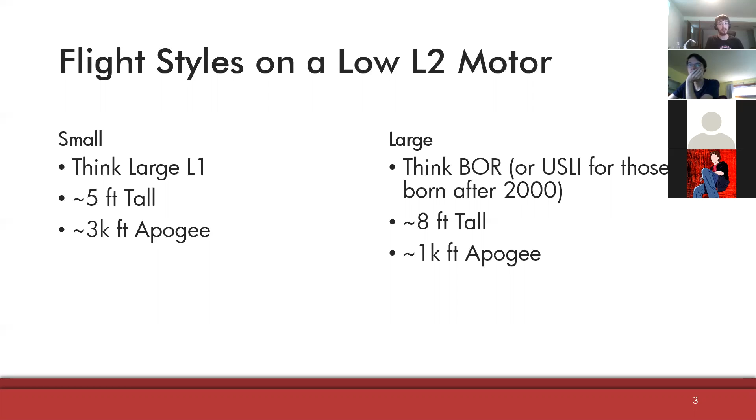Depending on what launch sites you're able to go to - if you have a place with a really low waiver, you might consider building a larger L2 so you fly under that. I personally think the trend in the past has been more people built these large L2s, although with my year in particular, me and Thierry, and I think Chris too, have all started building smaller L2s. Part of the advantage is I personally think they look cooler, although that's very subjective. But smaller is cheaper in general, and it can be easier to manage.

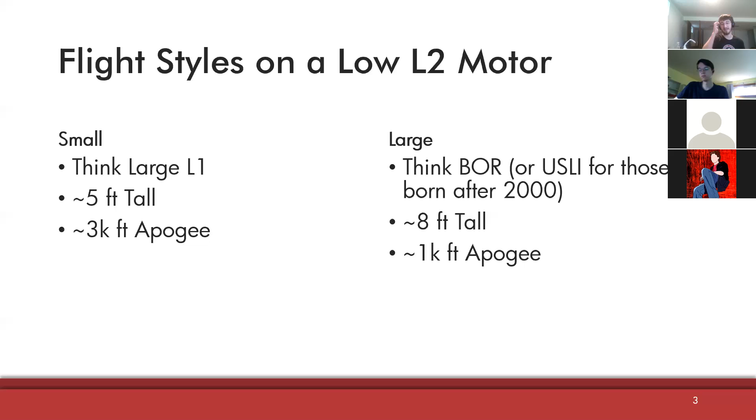One of the very important things is that you consider how forces are transferred through parts and ultimately into the airframe. Any force exerted on a small part of your rocket eventually has to be transferred to the rocket as a whole. You have to keep in mind that you can have the strongest part, like an aluminum bulkhead, but that doesn't mean much if it's affixed to something that's not strong enough.

Like putting an aluminum bulkhead and affixing that inside a phenolic airframe - that's a good way to break something.

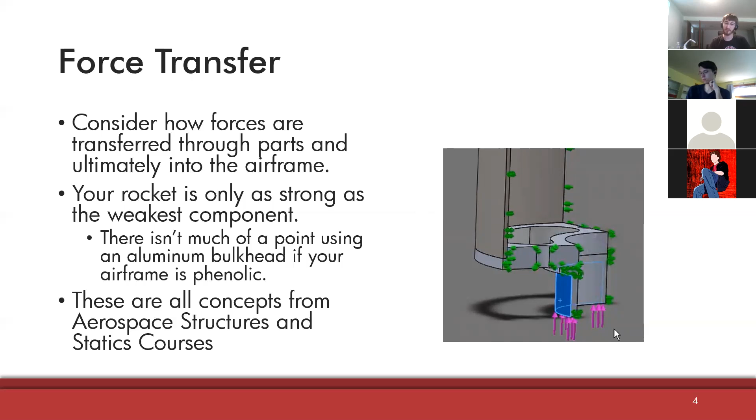These are all concepts that are talked about in aerospace structures and statics courses, and I also recommend going back and reviewing some notes from that to get a more intuitive understanding of how these forces are transferred through components.

Next up, the major forces you guys will need to consider. You can split these up between instantaneous and sustained forces. Instantaneous forces will tend to be considerably higher.

The largest force your rocket will experience is probably recovery forces - that being the instantaneous force applied by the parachute onto your shock cord, then into your bulkhead, and then from there into your airframe.

I think, out of the rocket failures I've seen that were mechanical, most of them have been due to some failure in handling the recovery forces.

For example, the very first USLI rocket was built with a bulkhead that wasn't strong enough, and it ripped out.

It's really important to make sure that not only is your shock cord securely attached to a U or I bolt that is very firmly attached to a bulkhead, but that bulkhead also needs to be secured inside the airframe such that it's not going to break out.

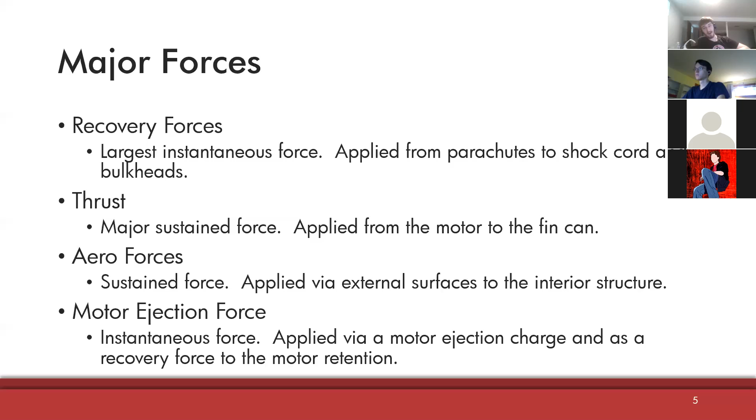Now that we've covered that, we can talk a bit more about materials. I'm going to go through some of the different major components and what type of materials are frequently used.

Airframe materials to start off with. I talked about this a bit with the L1 guide, but to go a bit more in depth, I've listed what I believe are the most common materials right here. There's certainly some others if you want to do some research, but going from weakest to strongest, we have phenolic.

Phenolic is essentially cardboard with epoxy to make a composite. It can tend to be a bit brittle, and might be a little difficult to design with, but if you keep your recovery forces low, use a large enough parachute, and get a low enough ground descent velocity, you can probably be fine. We'll talk about epoxy later.

Next up, cardboard, which seems like it should be lower on the list, but the reason I placed cardboard here is because you can buy really thick cardboard, which has different diameters than some other rocket components, so you have to be careful with the outer diameter. It is quite cheap and has decent performance, and unlike phenolic, it's not brittle, which makes your failure modes a little less catastrophic.

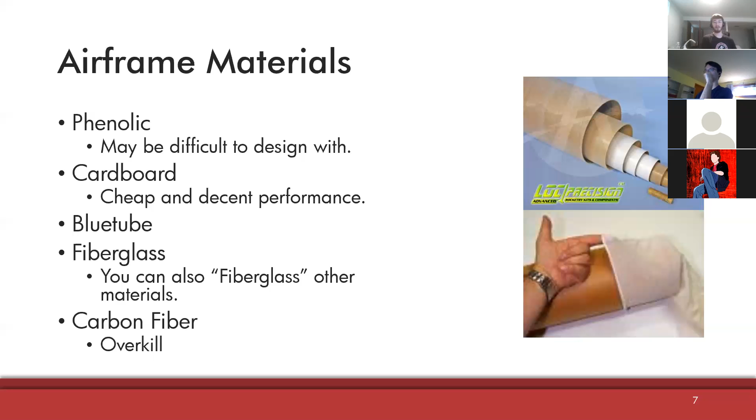Moving on, bulkheads and fin materials. I think in L1 territory, you can get away with quarter-inch plywood in almost any situation. In the L2 area, quarter-inch can work fine, but you need to be conscious of the size of your rocket and the recovery forces, because this is where you start reaching the upper limits of quarter-inch. If you're designing one of the smaller L2 rockets, you can probably get away with it. But if you're going for a larger one, I would consider switching to half-inch.

One other thing: if you don't want to buy a separate sheet of half-inch plywood, you can always epoxy two quarter-inch pieces together and make a sandwich. That's something we've done before. Next up, and these I do want to mention...

You probably should stick with wood when you're doing your first L2 rocket, but for larger L2 rockets, going higher, faster, whatever, you may want to consider switching to aluminum bulkheads, which, granted, requires some machining and can get quite expensive and heavy. But the upside is it's very strong, and you'll be very hard pressed to actually break it.

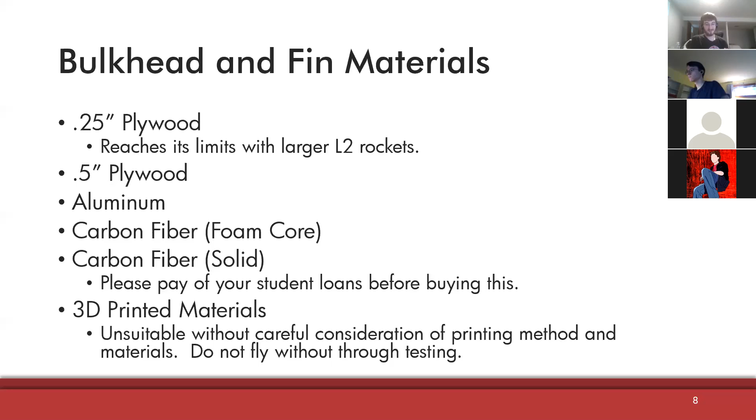Lastly, some fixturing methods, the main two being epoxy and bolts. Bolts can be a lot of fun and look very fancy. They're very quick to assemble. You're able to disassemble it, which could be advantageous if you want to replace parts, or if something breaks, you could just take the rocket apart and replace something.

The downsides being, though, in this case, you now need to design your parts with threads, which can be difficult. In some situations, you may require getting a tap for metal parts or using threaded inserts for 3D printed parts. They also concentrate stress, because for example, if I have a bulkhead with 4 bolt points, instead of the stress being evenly distributed around the entire circumference of the bulkhead, it's now concentrated at the points where the bolts are holding it on.

That's something you need to keep in mind when you're comparing the bulkhead to the actual airframe it's in. You need to make sure the airframe isn't going to get broken by all the stress concentrated where the bolts are.

As for epoxy, it does require some measure of skill in assembly. If you want it to look really good, you have to take a moment and actually do it right. I very highly recommend going online and looking up some tutorials about this—look at what a good example of an epoxy job is. Unlike bolts, once you epoxy something, that's it. You're done. You have to break it if you want to disassemble it.

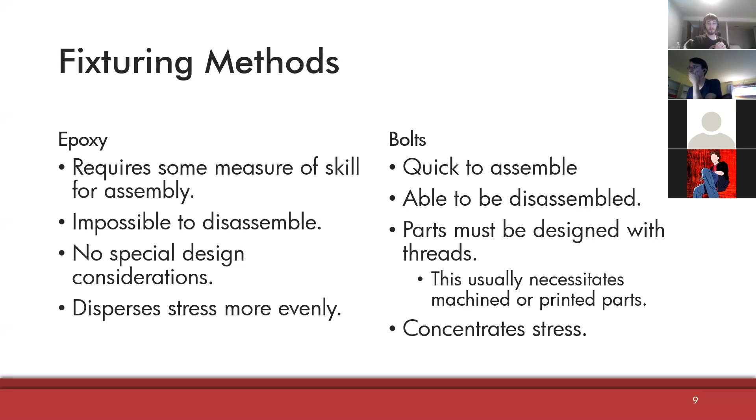But the advantages: there are very few special design considerations. You don't need any fancy tools to do it. And you can be a lot more free with what types of materials you're using. For example, if you're using a wooden bulkhead, it might be kind of difficult to bolt that into the airframe, whereas that's pretty easy to epoxy in. And lastly, if you do it well, you will disperse stress much more evenly, which can significantly reduce the loads that particular areas of a part need to handle.

To talk a little bit more on epoxy—just real quickly, wear PPE, nitrile gloves. Just don't get epoxy on your hands. It's not fun.

There's no such thing as just epoxy. There's a lot of different types of epoxies that are best for different materials, best for different environmental conditions, and also with viscosities ranging from everything like a light syrup all the way to putty and even clay.

It's definitely important to consider what you're epoxying. If you're doing something like laying up carbon fiber or fiberglass and you want to make a composite with it, you may want something a little less viscous. But in the case where you're epoxying in bulkheads or fins, you may want something more viscous, and might even consider using something like putty or clay. That will make it significantly easier to work with when your epoxy isn't just running off of what you're trying to do.

One of the things you can also use are some fillers for epoxy, such as Kevlar pulp, which will help reduce the runniness of it and can create some neat composites.

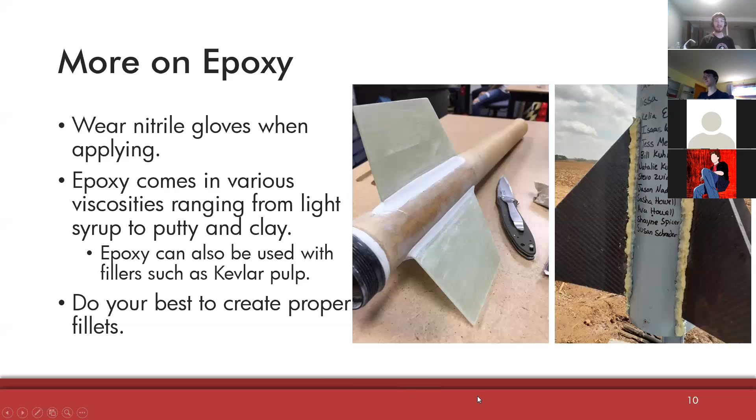Continuing on, now we're going to talk a bit more about actual structures within your rocket. I'm going to go through some of the common structures that you will need to have. This could vary depending on how you build your rocket, the setup and whatnot, but these will cover most situations. Afterwards, we're going to go into Solidworks and look at some examples.

Bulkheads, I've referenced these a lot so far, but the important thing to think of when adding a bulkhead is that its primary job is to take recovery forces and disperse them through itself and into the airframe without breaking.

These are probably one of the most critical components when you're thinking about how forces are distributed. You really need to make sure that anywhere stress is concentrated on your bulkhead, your bulkhead can withstand it. Because if you break a bulkhead, all of a sudden you have a free-falling object, and that's no good.

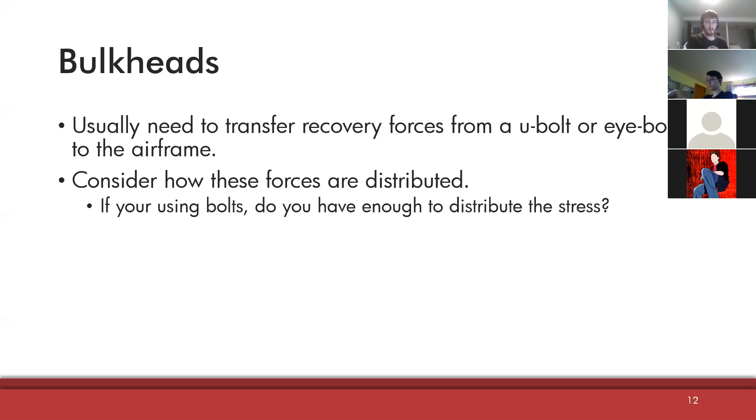It's really important to look at how your bulkhead is fixed to things. As earlier, I referenced epoxy and bolts. If you use bolts to affix your bulkhead, you need to make sure that both the airframe and the bulkhead itself can handle that, as well as the forces of the actual harness on it. Because of the nature of U-bolts and eye-bolts, those will tend to concentrate force in the center where you mount them. It's a very important part to get right.

Fin cans do a lot of things, basically just the bottom of your rocket. It needs to hold the fins and the motor in the correct orientation without any movement. You should strive to reduce vibrations and play, because if stuff is moving around, you introduce various moments and your rocket will have an unstable flight.

Safety-wise, it is critical that your fin shoulder extend to the motor tube, basically the shoulder being the tab on the fin that goes on the inside of the rocket. That is one of the things that could show up on your NAR Level 2 exam—it's all about fin shoulders.

Also, you need to make sure that you're using centering rings well, and those will do a good job of dispersing the force from the motor onto the actual airframe. You'll usually want several of them, not only for that, but also to ensure, as the name implies, that your motor remains centrally located and that it's not canted.

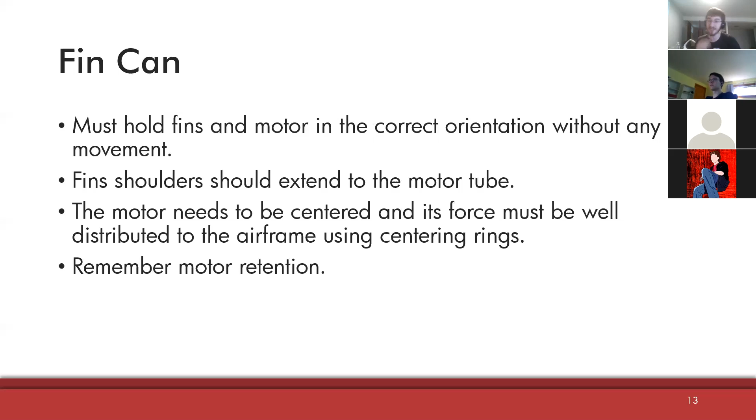Lastly, I want to talk a bit about the electronics bay, since this is probably the easiest one to mess up. Usually, in most situations, both sides of your electronics bay must take recovery forces, or at least one side. If you only have one side, then you're probably fine, but both sides is probably an easier design rocket-wise.

In any case, it's important to consider how your electronics will be mounted. This is vital to ensure that all your electronics are static in place and not bouncing around the inside. Typically for most altimeters, they'll just have holes in them that make it easy to put a screw in and mount them directly to a sled or some sort of 3D printed mount. If you're able to design one of those, that could be a very convenient thing to do.

But you also have to keep in mind components like batteries and whatnot that don't just have a convenient mounting hole. You need to make something to keep them in place.

You also need to make sure that your rocket is actually sealed off from the electronics bay. One failure mode to avoid is having ejection gases leak from a black powder charge just above the E-bay. You want to avoid those leaking into the E-bay, because that will increase the pressure and could cause your rocket to think it's at some other altitude, possibly even causing another charge to deploy, which will mess up your day and your rocket will drift very far.

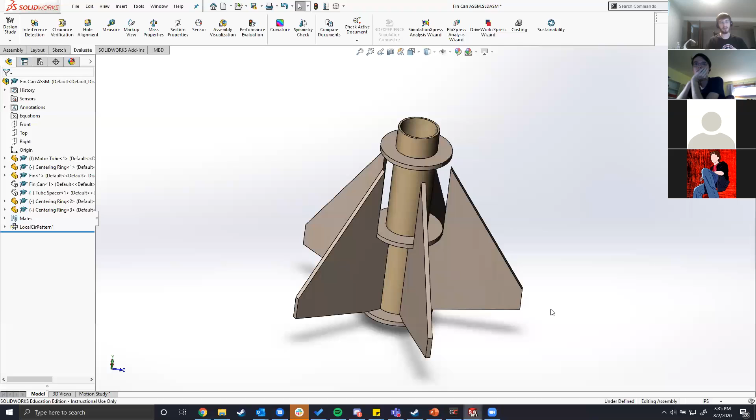Moving on to some examples, we're going to go into Solidworks now and take a look at this. There's a few parts in, but this is a very basic fin can. You can see there's the fins, tube for the motor, and centering rings. This is really the basics, and you'd have your actual airframe tube that slides down around the outside.

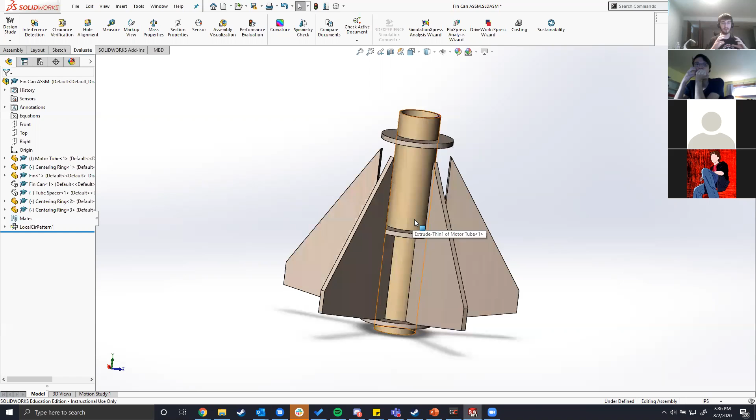Unfortunately, I don't have one CADed, so I can't put that in. But essentially, you'd assemble this section, put it in, and so on. This could very easily be assembled using epoxy by filleting all these different interfaces, putting a fillet right there, etc., to make sure that it's all well and good.

I will note this does have 5 fins. The easiest way to assemble a rocket is using 4 fins. That makes it really easy to make a jig to keep the fins properly angled and not canted when you're assembling it.

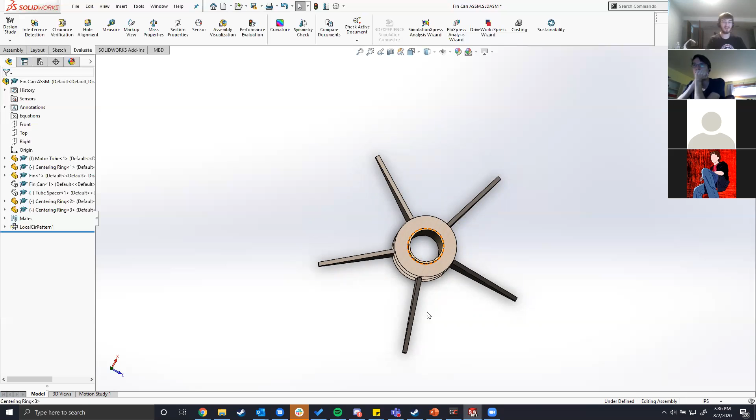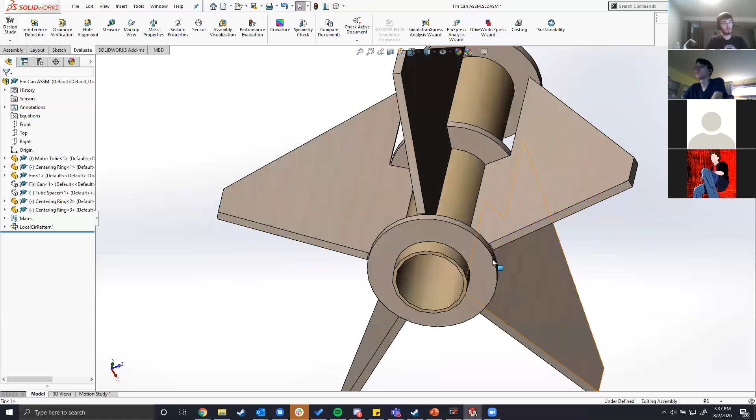If you're assembling with epoxy, you will need to be sure to hold everything in place while the epoxy cures. You can see one thing missing from this is actual motor retention, so in an actual design, you may want to drill some holes and add some clips here. This is probably one of the simplest ways you can design it.

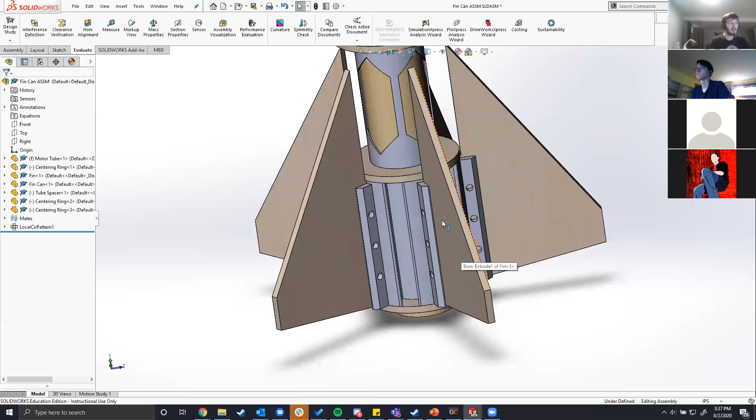Now, if we unhide some components, you'll see this is actually more complicated than you initially thought. This right here is the fin can for my rocket, for my L2. You can see here, instead of just having the fins epoxied straight in, now they are located within this 3D printed mount.

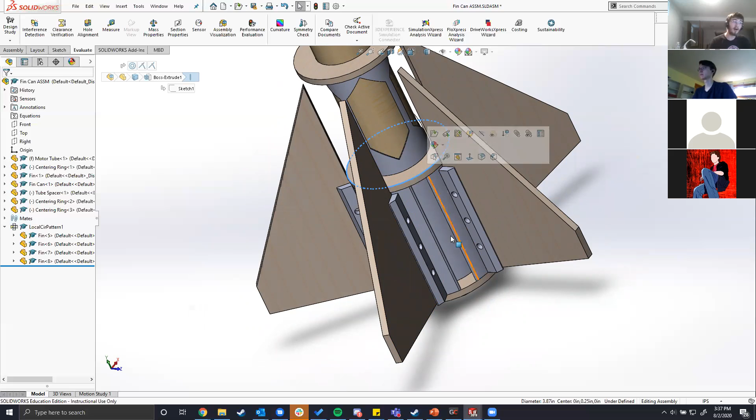One thing you could do is epoxy them into a 3D printed mount and onto the other parts and call it a day, which will probably reduce the difficulty of assembly. We've kind of mixed epoxy and bolts by having most of this be epoxy together, and the fins are bolted in through these slots.

This is advantageous because fins are probably one of the parts on your rocket you're most likely to break, and so if you're able to replace fins, that could be really helpful. I didn't really break a fin, but I definitely very much scuffed up a fin that I'm considering replacing, which I can do because I can just take the fin out.

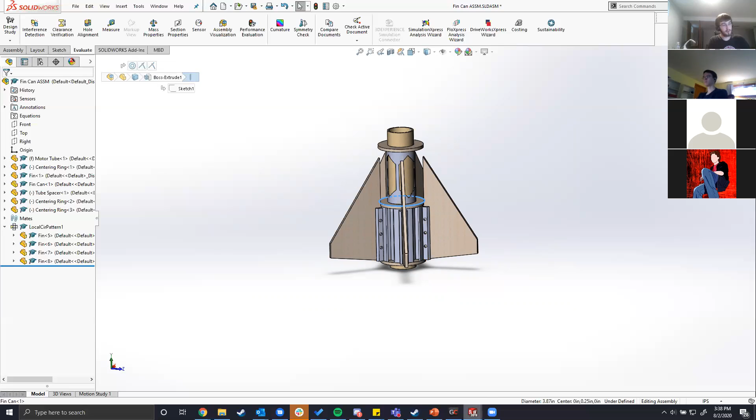It's changes like these you might find will make your standard fin design a little bit easier to manage. Now we're going to take a look at the USLI rocket to see a very fancy fin can design.

Once this cross section gets done, I probably should have done this beforehand. My apologies.

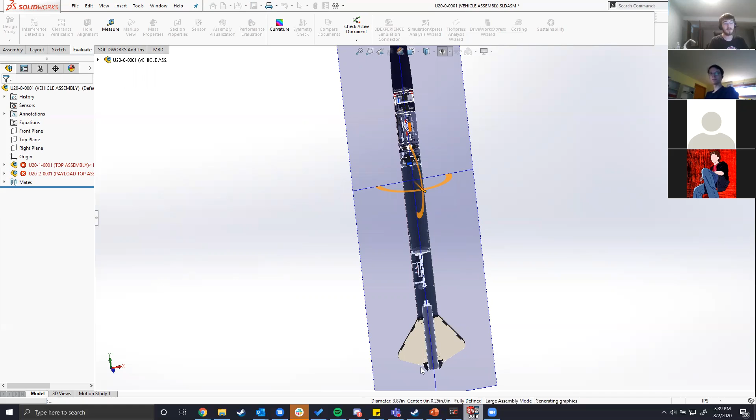In the meantime, I definitely very highly recommend making a CAD model of your rocket before you actually build it. That way you know for certain where all the pieces are and how you're actually building it. You by no means need to build it perfectly to the CAD model, but it really does help.

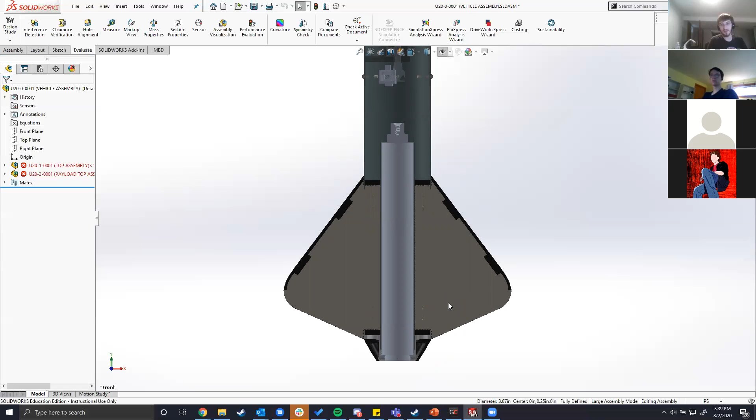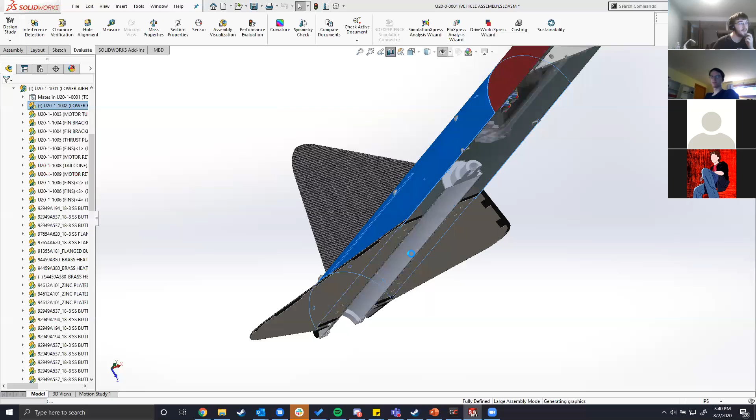So you can see in here, I'm actually going to hide... I'm going to hide the lower airframe so I'll be able to get a better look.

From here, you can see the USLI design. We have, rather than centering rings, brackets on either the top or bottom of the fins, and then this is completely assembled with bolts. Obviously something like this takes a lot more work to design, and is probably more than you will want for your L2.

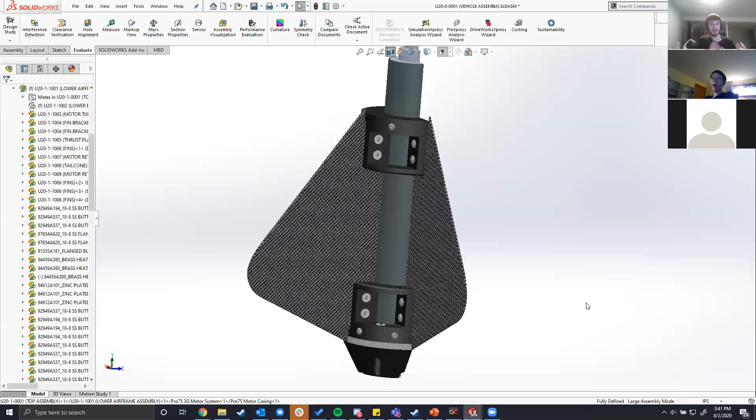But it can be useful to see how some of these patterns look, and how you could possibly translate some of these concepts into your design. You'll notice one of the things I caution about is using 3D printed components, whereas these brackets are 3D printed.

In a situation like this, where you really do want to use some 3D printed components, because they're an internal structure, that makes it a little bit easier. They're not bulkheads, which is nice. In addition, it's also printed out of nylon X, which is carbon fiber and nylon, so it's a very strong material.

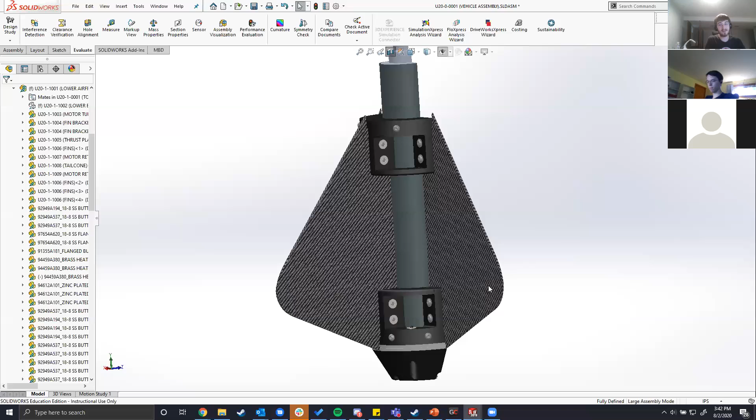If you're considering doing anything like that, use something that's reasonably strong. Don't use PLA. If PLA gets too hot, its strength goes out the window, and especially where this is right next to the motor, that's not a good time.

You'll also notice that for retention, as opposed to the clip design I was talking about earlier, there's a full-on threaded bolted-on ring system down here, and that can get a little fancier. You can actually go online, there are boat tail retention systems you can buy that I'd also suggest looking into.

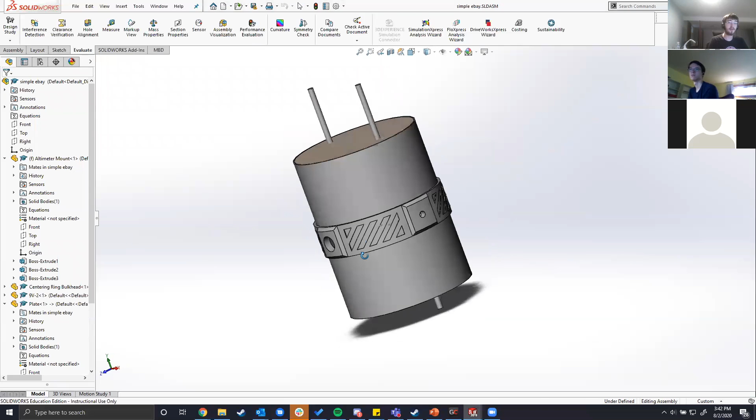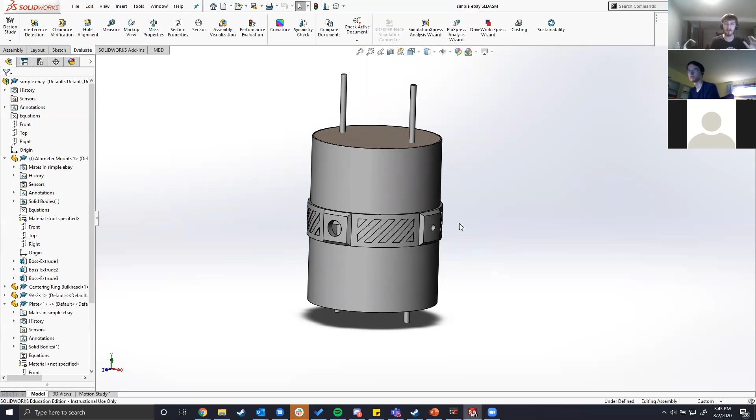The other parts I want to show you are two examples of e-bays. So here we have my L2 rocket, which is the very simple, straightforward type of eBay design. This type of design is much more classical, and you'll see it a lot online.

The idea is you essentially have an outer frame. A quick note before I hide this: you'll note I have a lot of detail on this, because this is a 3D printed component. I've since learned this probably wasn't the best idea, but it did the job.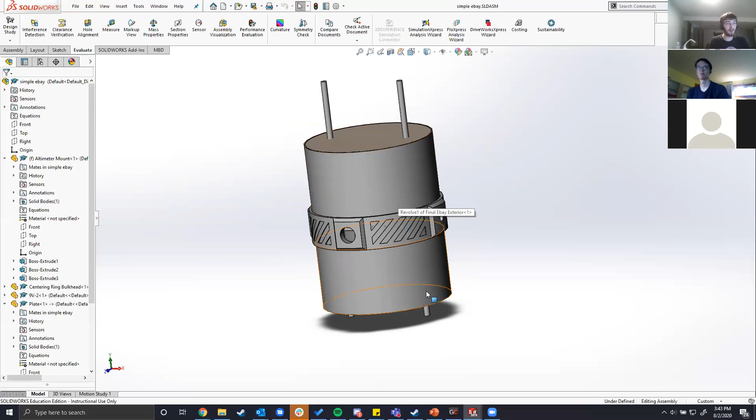You can easily do the same thing by having one piece of inner tube with a small ring of outer tube right here. So now if we hide this, you can see the interior structure of the eBay, which granted is a little odd since typically you'd have a vertical sled.

But in this design, you can see I have this mount on the bottom, which holds a 9-volt battery for power, and this mount right here where the electronics get mounted.

Because it's a level 2 rocket, it's not for any competition, and I only have one strato, which makes the wiring very simple. It just needs a pressure hole, and to be connected to the charges, the battery, and an arming switch, which is all very straightforward.

It's not in this model, but I would have some holes that the actual charges go through, and I highly recommend putting the wires through and then using epoxy or something else to seal it, then put some kind of screw connector on the other side—that'll be an easy way to mount charges.

The upside to a type of eBay like this is it's very easy to make all the parts for, and it's very simple. Oh, I also forgot to mention these cylinders are threaded rods that I was too lazy to fully CAD myself.

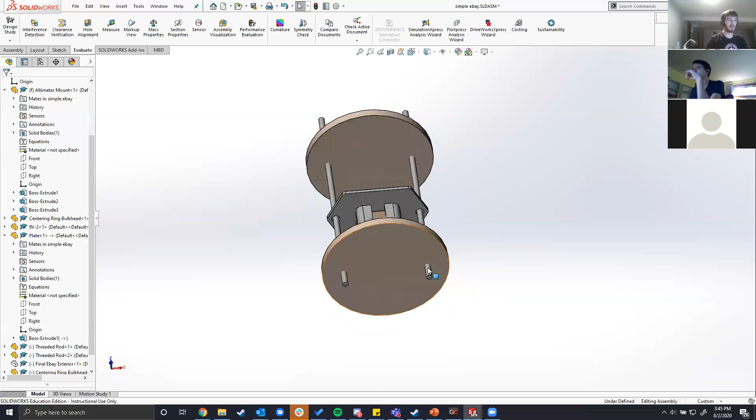The idea is each of these parts is held in place on the threaded rod using nuts that secure it in place. This has the advantage that the threaded rod takes pretty much the most of the force, and that keeps the force off the 3D printed component I had for the exterior.

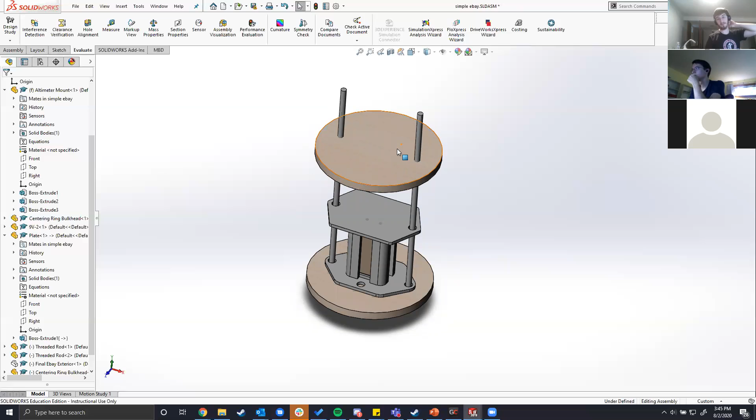Also not shown, but there'd be a U-bolt or eye bolt in here. The big downside to something like this is that it takes really long to assemble.

Having to work with parts that all need to go in the same space, while also trying to get wiring in there and connections—you need to more or less make really long wires, assemble it all outside, and slide it in, and it can become a mess.

It takes forever. You do not ever want to do that at a launch field. If you're having to mess around with a sled-type eBay at a launch field, you're going to have a terrible day, especially if it's winter. It's no fun at all.

You absolutely need to make sure you can assemble it beforehand while you're in the building, and not on launch day, in such a way that you have the wires coming out of it in order to connect to the charges. I'm really dreading having to reassemble mine because I took mine apart to get data off the altimeter, and I'm not looking forward to putting it back together.

But I'll say, if you just need this to work for a flight every once in a while, and you don't need data off it that often, this is a fine design, and it does really work for a first one. But I would say, if you're creative, you could probably find a way to make this more usable.

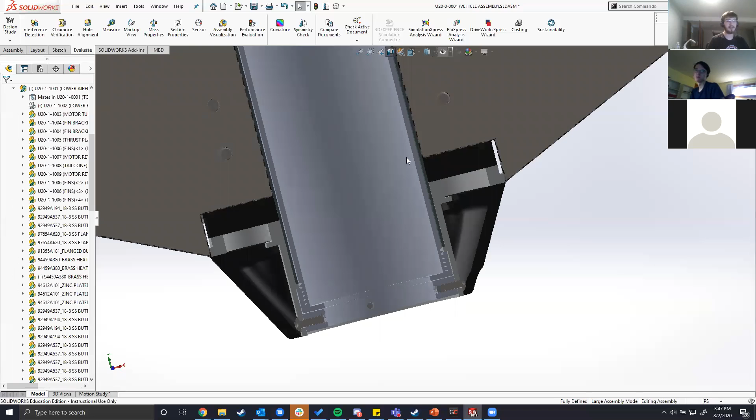Finally, we're going to take a brief look at the eBay for the USLI rocket to see the very polar opposite.

So you can see in the USLI design, on either side, it's hidden down here for some reason, but there's an aluminum bulkhead, which is necessary because of the higher forces this rocket experiences. It flies higher, falls faster.

And rather than having a threaded rod to transfer force, there's a nice sturdy aluminum bar. Something like this is very, very structurally sound, and you'll be hard pressed to break it.

Again, that's something that is probably pretty difficult to do for your own L2 just on your own. But you may want to consider adding something similar. Just off the top of my head, if you really needed some extra force, you could probably find some way to do it with a bar that you can buy at Home Depot or something, or a pipe. I don't know. Be creative.

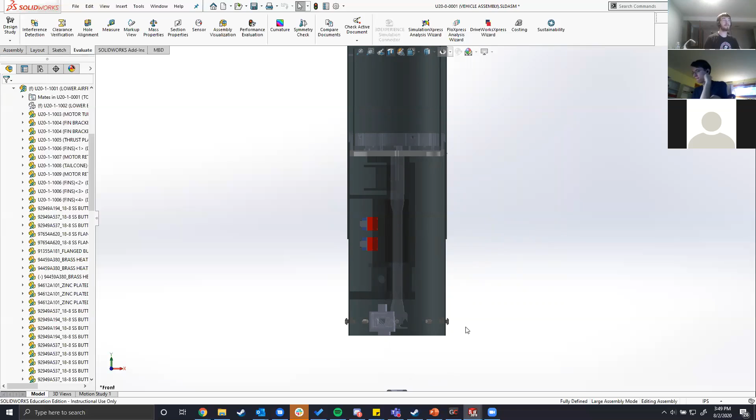But you'll also notice, rather than having a sled, there's a 3D printed mount that has specific mounting holes for every electrical component. And that makes it very organized.

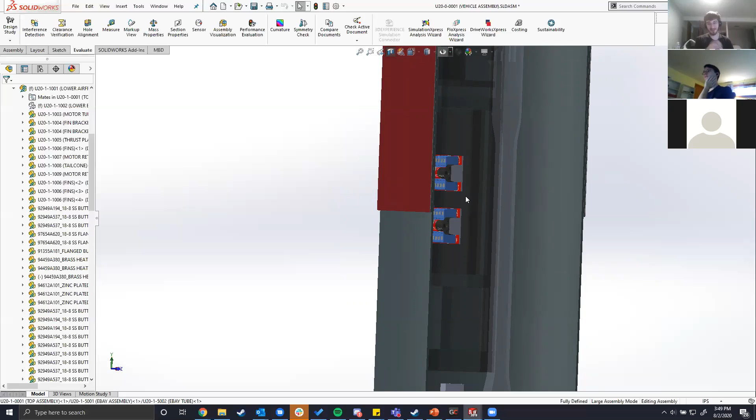I believe this also has very simple wire routing, or not simple, planned, I should say, as opposed to my eBay, which is more or less just get the wires long enough and shove it all in there. And this can be very appealing.

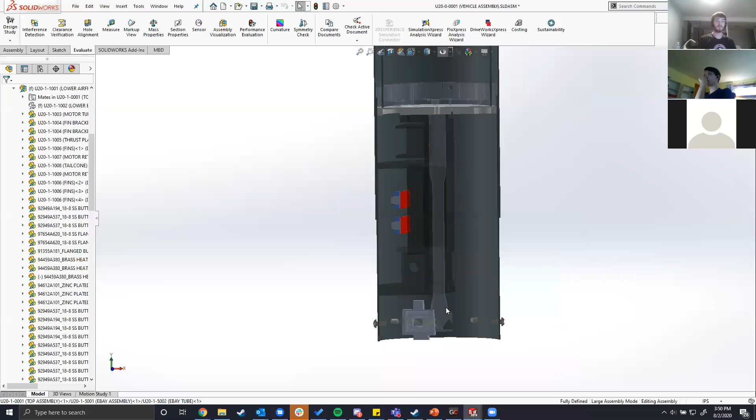And lastly, I won't go into the details of the mechanism. I'm sure you could reach out and talk to someone if you're curious about it. But this eBay, to install it, it gets inserted, twists, you put in a few bolts, and it's done. Essentially, the bar down here locks into the plate. And that's more or less the complete opposite of what I had, whereas the simple sled eBay can take like an hour, this takes like a minute.

I definitely think it's worth putting a bit of effort and considering how your eBay is assembled. I know it wasn't the original plan, but I think I will show you some of the other eBay designs I made a while ago. I will caution you that these were never actually used, but just to give you some examples of ways you can be creative.

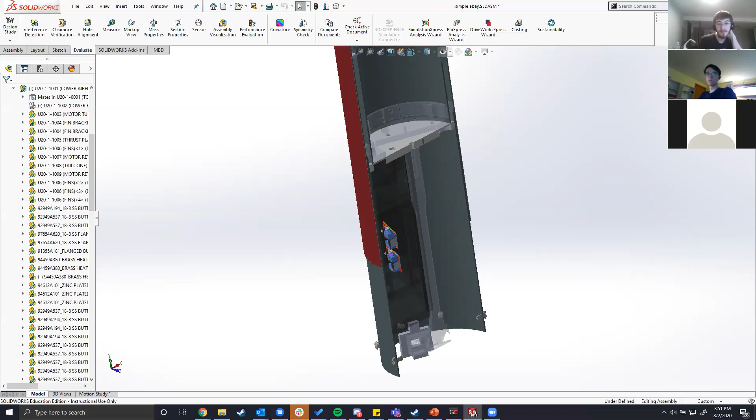We have, I'm going to close this so that Solidworks doesn't get angry. Don't save. Give that a moment. There we go. Here's probably the most wild eBay I've designed.

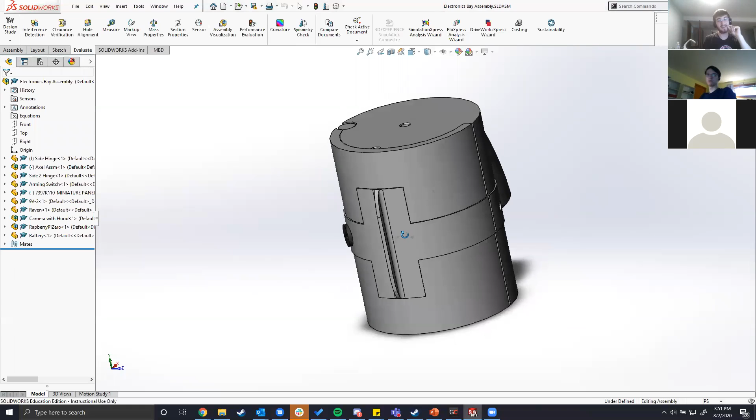So if we look at this, you'll notice that there's a lot going on with this eBay. This was designed essentially for my L2, but I never ended up using it. The idea being with this, you have a hinge, so that rather than opening the eBay by taking the bulkheads off, it hinges open.

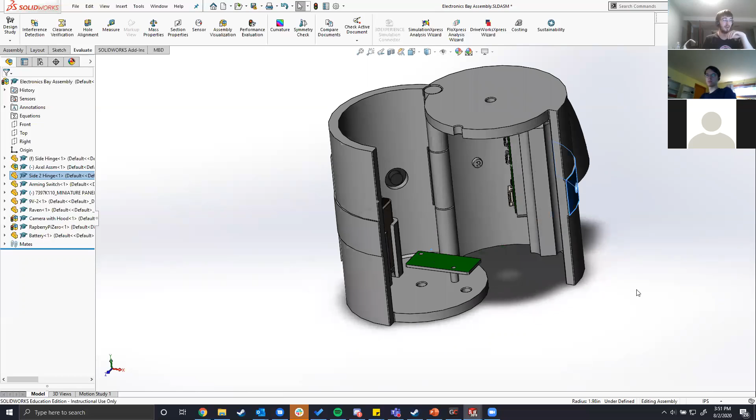And you'll notice, this was intended to be 3D printed. You'll notice that I have 3D printed bulkheads. This was before I learned that that was a terrible idea. Don't do this.

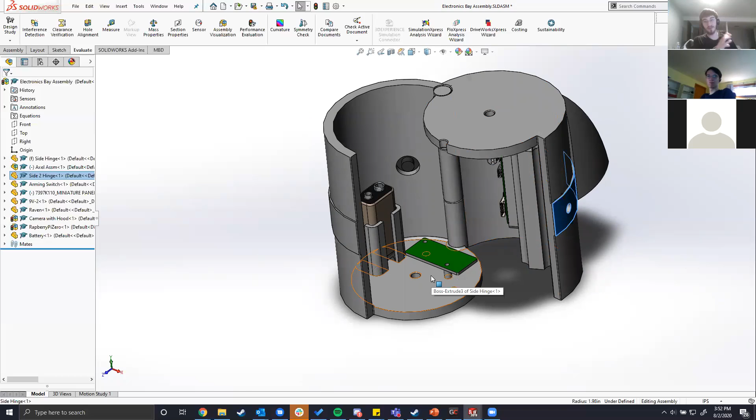And there's holes to have one threaded rod that goes through the hole through the center. And you can see, I have mounting points for the altimeter and a battery and a switch and this hole. I know this original plan also involved putting a Raspberry Pi with a LiPo battery. And there's also this camera hood right here.

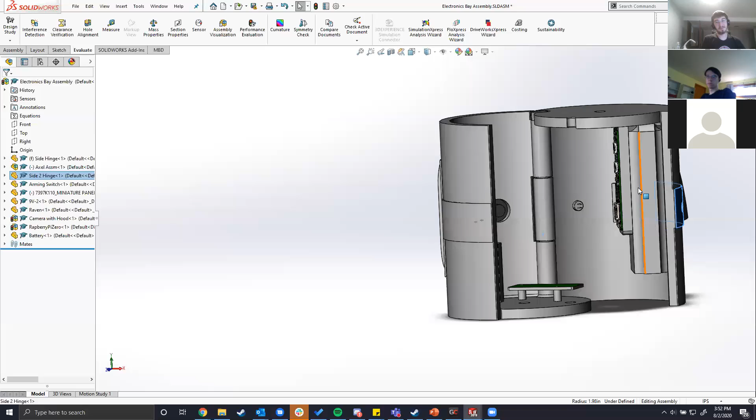This probably could have been done with a much simpler system, but it was interesting to CAD. So you can see, you can get pretty creative.

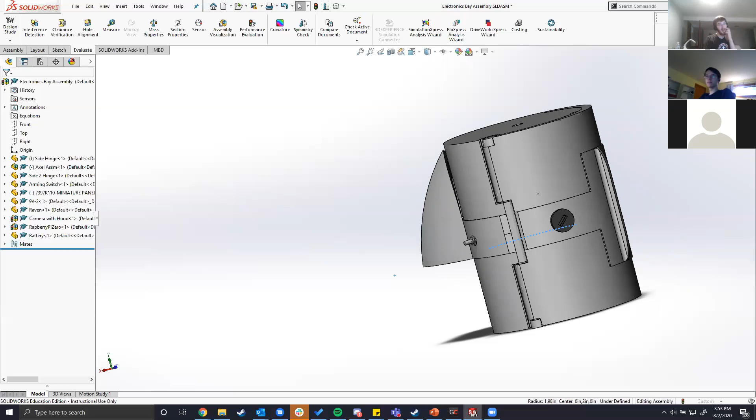And lastly, as a sort of middle ground, I have a weird triangle eBay if I can find it in this folder. I have too many eBay parts in this folder, I'm sorry. Here we go. So this one is kind of a mix between some of the other things.

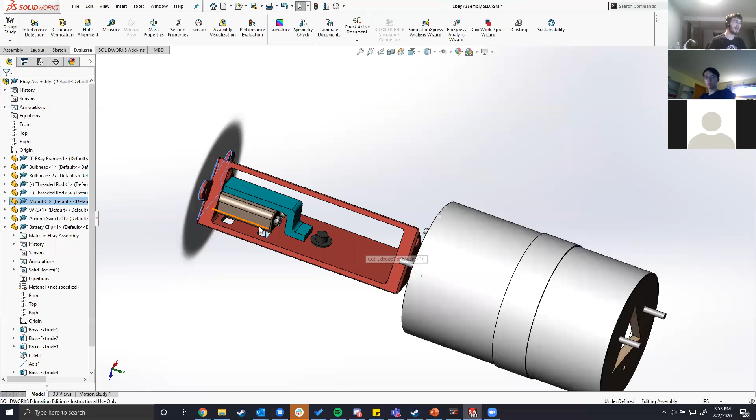But you can see if I scroll out, essentially there's a sled in this that is on this triangle 3D printed sled where you'd have your electronics mounted there and a battery and whatnot. But this was me trying to make a sled that was easy to put in and take out.

And you'll notice I had to do some weird things like inset this, this is the arming switch right here. Once it's in, you have to reach in quite far with a screwdriver to get at it. Not ideal, but it works.

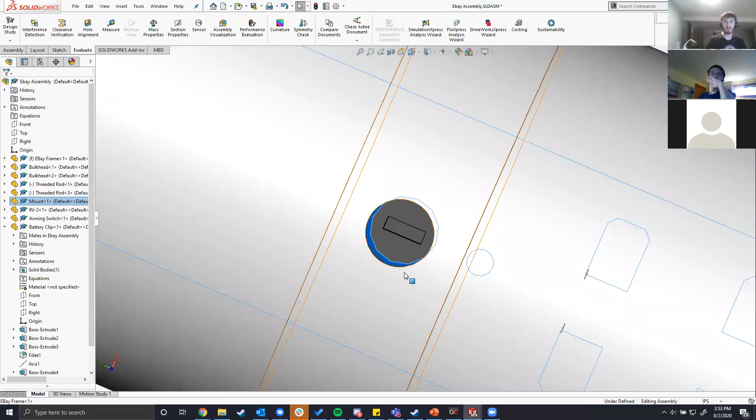And you can see this also does retain the non 3D printed bulkheads along with threaded rods. And I believe there's actually a spot for a third threaded rod here. I don't know why there's a threaded rod there, but so yeah.

I would encourage you to put some thought into how your eBay gets assembled.